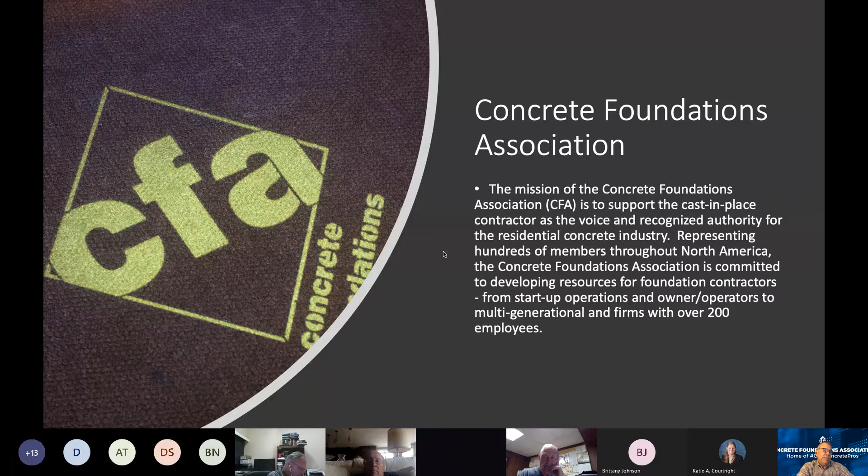Some people have called it the basement dweller industry or basement dweller association, but it really is cast-in-place concrete professionals working in relationship to the International Residential Code.

So what we're going to talk about over the next however many minutes, I'll go until you pull the shepherd hook out and get me off the stage. We're going to talk about cracking in particular.

I use that headline, or the title of this presentation, quite a bit in all of my presentations, whether I'm teaching certification, educating architects on what's available and what opportunities are out there for concrete, or when I talk to real estate agents and help them see how to evaluate concrete systems. We always know the three truths of concrete: it's gray, it gets hard, and because it gets hard, it inevitably cracks.

As structural engineers, you rely on its cracking, because that's what gives you well over half of your design work. Those of you that work with concrete know it's the fact that it cracks. And because it cracks, there's the whole steel reinforcement aspect. Today we're also getting into glass fiber reinforcement products, random reinforcement, or three-dimensional reinforcing.

So there's a whole nature of the industry that relies on the fact that it cracks. But ultimately why we're here is because cracks become problematic, and it runs the gamut from aesthetic to structural problems.

I've broken this presentation up into 4 key areas. We'll talk about some crack patterns and common causes for those cracks. We'll talk a little bit about cracking concerns—when we do see a crack, or when someone sees a crack, what is the concern for it? What might we assign as associated concerns with those cracks? We'll look at some plausible solutions, and then I'm going to go a little bit deeper into the 3 areas that I have primary responsibility for, which would be slabs, below grade walls, and above grade panel construction.

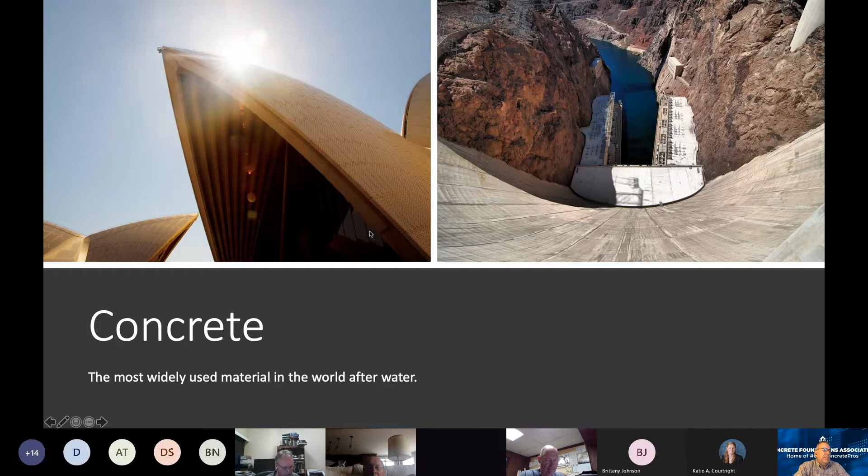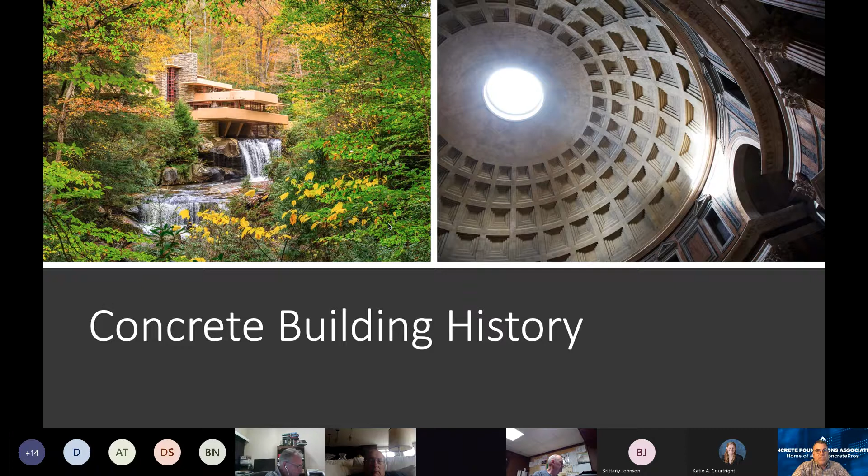The former director of the CFA, who was my business partner for a lot of years, he and I were having dinner last night, and we were still talking about the chance to get to visit this structure. It's still in operation today, and that's staggering to me—to think about concrete and the longevity of its behavior and performance—yet cracking is what we're going to focus on, and the fact that cracking does happen and causes problems in today's concrete.

So let's go into distinguishing some crack problems, some patterns, and some causes.

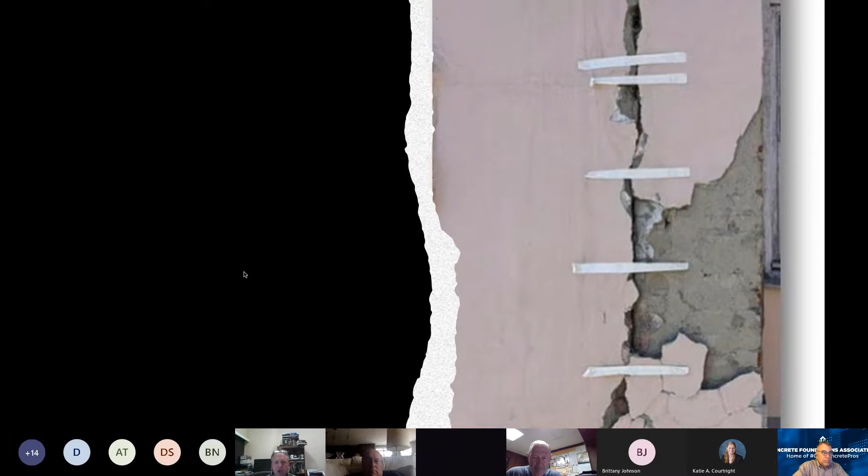A homeowner may say, hey, there's a crack, I'm worried my house is going to fall down. But that's not the same as an engineer looking at it and knowing instantly that's a problem we have to address right here and right now. What we're going to be talking about is more the in-between segments of cracking, and maybe the finer side of cracking. Before I do, I want to talk about concrete materials, because...

It's the nature of the concrete material that causes most of the cracking that we see. We know that concrete is very basic—one of the reasons why it's the most popular, most widely used material is because it is so basic and so local.

It relies on Portland cement, which is the powder, and everybody in the concrete industry hates it when they're at a meeting of a local school board or city council and somebody's talking about the cement driveway or the cement sidewalk.

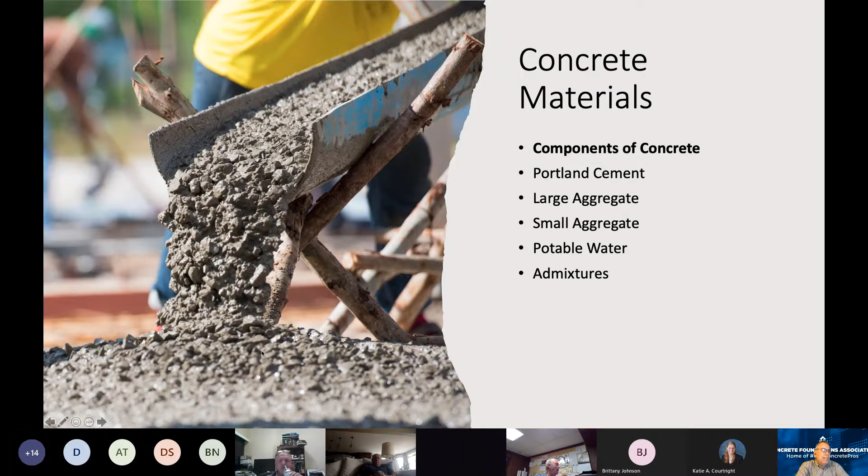Cement's the powder, concrete is the hardened product, and it is because the cement gets mixed with large aggregate, small aggregate, the water itself, some admixtures in today's world because our technology is so great. You see the product sliding down the chute there, and the delivered form is a nearly high viscosity, seemingly fluid mixture combined with some space-making materials. Once the water is introduced to the cement, we realize that there's a chemical process that takes place, and the concrete begins to instantly transform.

The chemical process is hydration. Any chemical process has a byproduct, and the byproduct of hydration is heat. We could spend another 2 or 3 hours just talking about the behavior of concrete and its benefits from a heat generation perspective, but that's also a characteristic that sets the foundation for why we're talking about cracking today. And so we rely on these crystals.

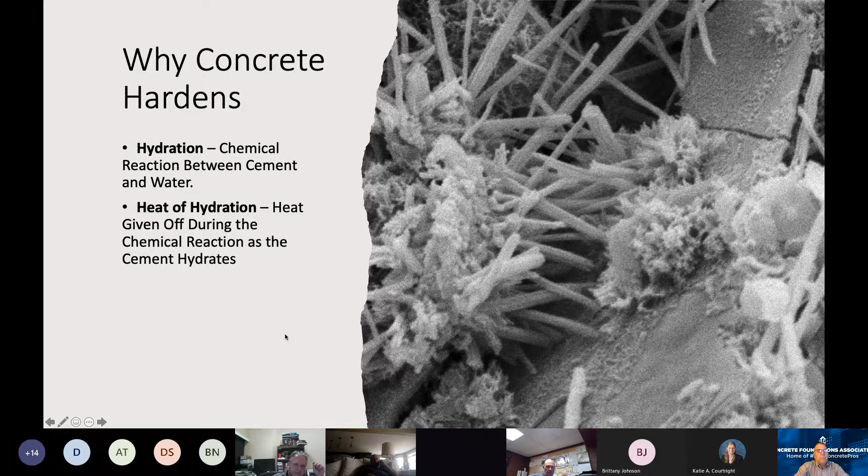This is a microscopic view of hydration, and it's fantastical—the stuff of science fiction. You can see these crystals beginning to envelop everything within the mix. It might be a structural embed that you've designed to connect a panel or a foundation element to another part of the building, it might be the aggregate itself, it might be the reinforcement. But these crystals begin to grow, and they are quite voracious as they consume the water and develop strength. The strength comes from these crystals that connect everything together.

So concrete needs three things. It needs water—we know that, it's a chemical process, a reaction of the cement to the water. It needs temperature; if we cool concrete down, and certainly if we let it freeze, hydration will stop because the water becomes a solid, and if the water is a solid, it can no longer react with the cement.

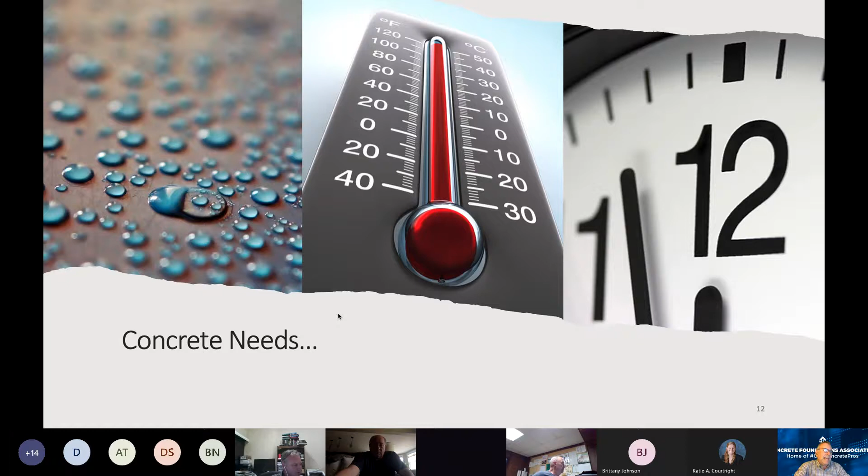So concrete needs temperature in order to mature or gain strength. It also needs time—the longer we give it, the stronger it's going to get. We know that because you as structural engineers will specify a 28-day strength for the type of concrete you want on a given project, and yet a contractor might be looking at the 5-day or 7-day strength. Or maybe it's an elevated slab they've been heating to increase its maturity more quickly, and they need a 3-day strip. So time is an element that's very important to what we're trying to get out of the concrete from a strength perspective.

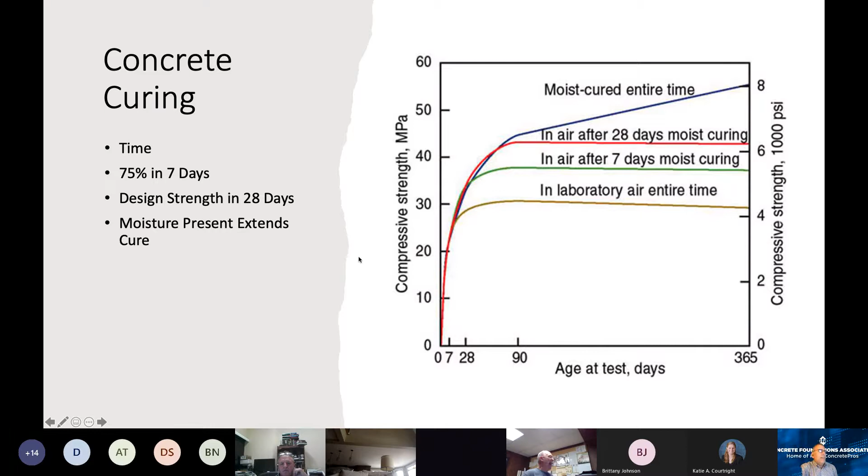This just gives you an idea of how effective moisture is. That means in order for us to really do what we need to do, and we'll look at some slab cracking examples, if we want to control the behavior of the concrete, think of concrete as an animal. If we want to control that animal, the best way to do it is to keep moisture present.

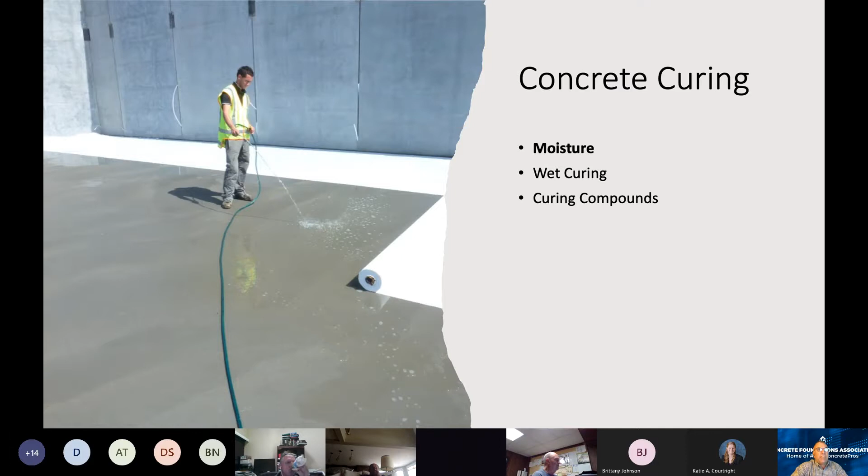The bigger it is, the wider it is, the larger the square footage, the harder it is. So you see a contractor out here putting some water down over the concrete after they've gone ahead and floated it and finished it off, and then they're going to put a fabric over it, and this would be a water barrier fabric that's going to keep that water in on top of that slab surface to help give it that moist curing environment. Try to get another 3 or 4 or 7 days out of its curing before the water is completely consumed or evaporated.

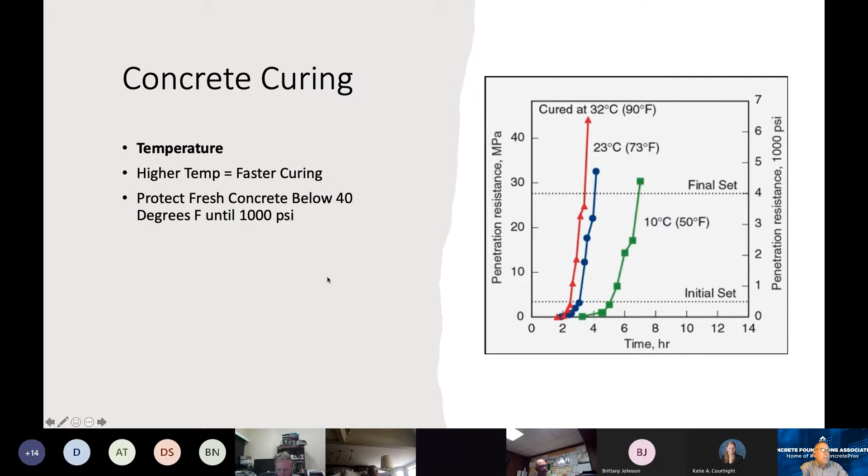And it will negatively impact construction schedule. But we're talking about it from a concrete cracking perspective. And as we look at some of these examples, the importance is that the delay extends the behavior of concrete and lessens the behavior of cracking. So we become less concerned for cracking the slower it gains its strength, because we're consuming water at a slower rate, which is also controlling its dimensional change.

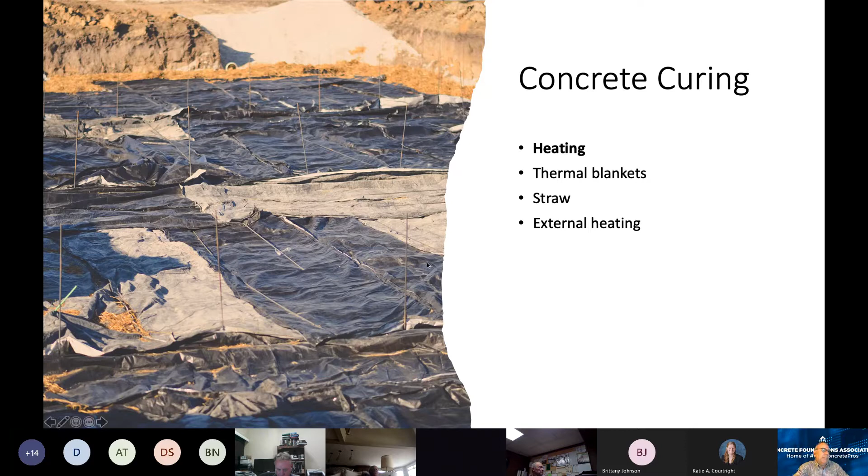We can also, on the other side of it, get into the summer months, and we're trying to slow that heat gain down, because a 100-degree Colorado day with the sun beating down on it, as dry as your environment is, your climate is going to suck that moisture right out of the concrete, which is going to mean the strength is going to get to its finite strength cap, or its ultimate strength cap, more quickly, but it's also going to dimensionally change more quickly. That's what we're kind of setting the stage for as we begin to look in on cracking.

So some of the things that we know, again, the framework for what we're talking about: of course, you specify a concrete in terms of PSI, pounds per square inch. Compressive strength, typically the range that we deal with in most of these construction industries is a 2,500 PSI baseline, maybe up to about a 5,000 PSI. And if you talk to ready-mix producers today, they're really targeting in at a minimum of 4,000, and a lot of them are producing 5,000 PSI, because they know if they deliver a little extra concrete strength, that it handles some of the problems that are closely associated with mix performance, excessive moisture, added water on the job site for viscosity and flowability, maybe even the concern that a concrete's going to crack and they're going to get the finger pointed at them because it didn't get to the strength that was specified, and so they give a little more to it.

And so the modulus of rupture is relatively low. If concrete is weak in tension or flexural crack resistance, that modulus of rupture means if we apply pressure perpendicular to its structure, it's going to fracture at a very low strength.

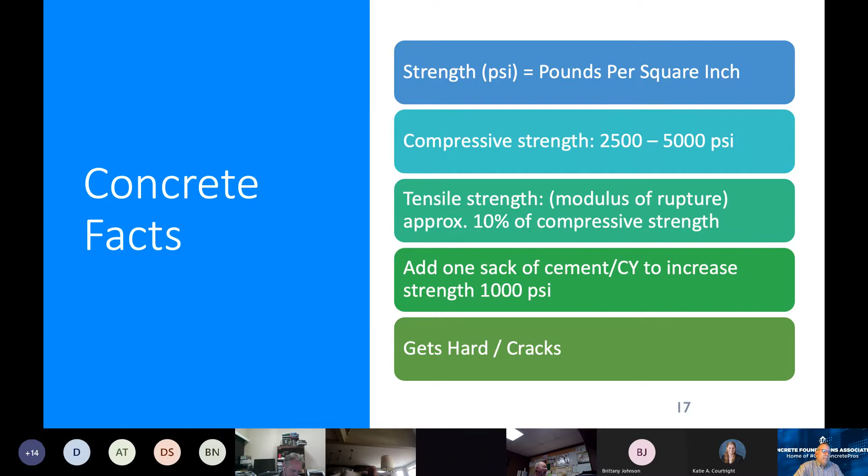That also means we have to look at what sets up the stress in the concrete that ultimately develops the cracks that are brought to your attention, or mine, and everybody's concerned about them because they're unsightly. What are we going to do about it? Let's take a look at why that happens.

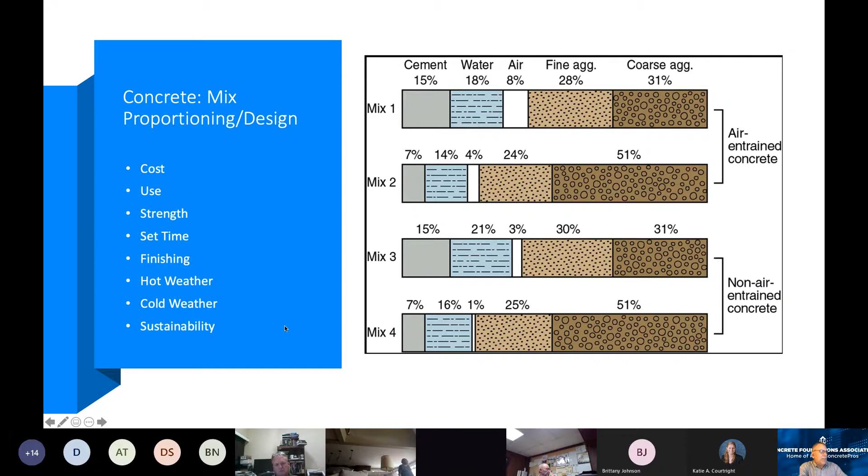And that's where we begin to set concrete up for the type of cracking that most often is the callback or the concerning call that we get. It does change based on a lot of these variables, particularly the evolution between hot weather and cold weather. So we know adding water happens—adding water can be a good thing.

When we're adding water, you can see a lot of the disadvantages. I speak to contractors about this all the time - it's a rigorous part of our certification, controlling water. But the three things that are most important to me are the poorer bond between the concrete and the reinforcement, the increased drying, shrinkage and cracking, and the greater volume change. Those are the three things setting us up for cracking.

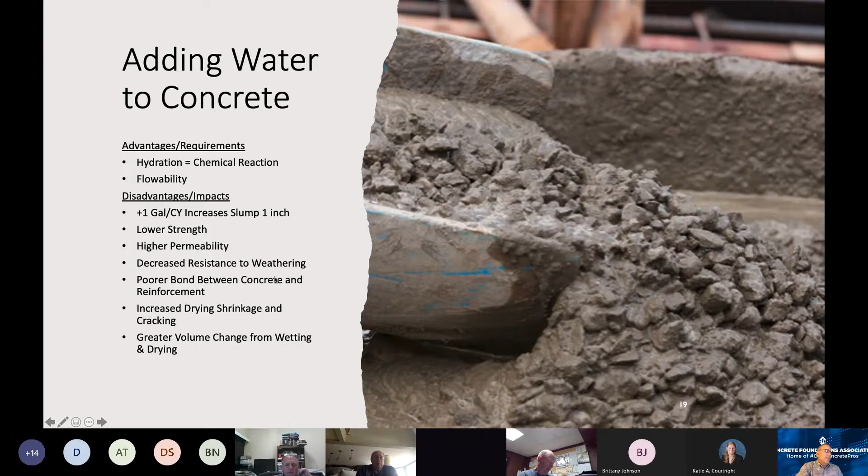And what do we get? We get cracking of all kinds of natures. So here's a porch stoop slab. In this particular design, you might expect a frost wall around the perimeter of this slab, and then they poured a concrete cap after they backfilled it - let's hope they engineered it and put a nice subgrade aggregate underneath there. Then they placed this concrete and really felt like they did a great job.

It was a beautiful looking surface that they left for the homeowner. The next spring, they get a call from the homeowner saying, I've got this huge crack across this porch stoop - what caused it, what are you going to do about it? We know that's a classic example right there in a horizontal plane of horizontal cracking coming from shrinkage, the volume change.

I'll be willing to bet anything on this particular case, the contractor used a high water mixture, a high water cementitious ratio. They were probably either wheelbarrowing it in or direct shooting and wanted to make sure it flowed in there well, and it probably didn't have a high constitution of aggregate. Lo and behold, as that concrete tried to dimensionally change - it's anchored at the left side against the brick wall, and anchored on the opposite side, we're looking in on the short side - it just tore itself apart.

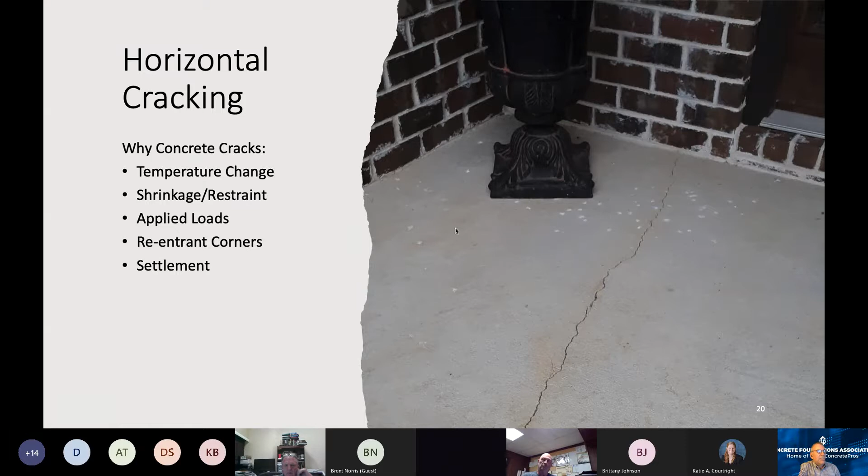Here's another one - this is a vertical wall. This crack that you can see, we're looking right at a form joint between two cast in place form panels, and then a crack that loosely follows that form joint running up or down the wall. Again, the nature of these cracks - the homeowner goes down, maybe trying to finish the basement, and what do they see in addition to the crack? You can kind of see it with these tan lines coming off that - that's soil residue. Moisture's been coming through that crack.

It's an indication of when a crack is problematic, and we'll be talking about that throughout, because we're getting moisture coming through that crack. In general, this is a shrinkage crack. Shrinkage cracks - because the wall ideally should be reinforced, although for the better part of 50 or 60 years, even the International Residential Code did not require any reinforcement, any horizontal reinforcement in residential concrete walls - there was nothing really holding that wall together, that crack together.

So if there's nothing holding the crack from getting wider, or from slight, minuscule to the eye displacements, it's going to start leaking. And it leaks from additional water pressure in the soils outside, any changes to the drainage if drainage is present, changes to the grade as settlement occurs, as well as applied loads.

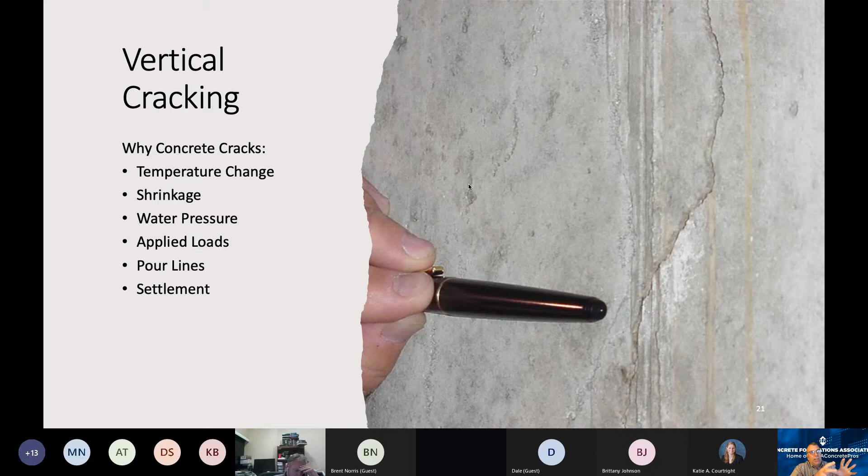Maybe somebody is parking a camper out on the backside of a wall in the backyard, and they don't realize the load of that camper on the ground can start to push in and create some changing conditions to what the design initially had accounted for.

Here's another type of crack. We looked at horizontal and vertical shrinkage cracks. Now we're looking at what we call a reentrant crack. This is probably one of the most common cracks, particularly when dealing with geometry-based cracking or vertical sections. Although we see them a lot in horizontal planes, typically contractors do a good job of making sure they cut a joint in a slab related to that reentrant corner.

But a reentrant corner is basically any time you see an interior corner to a concrete mass, or where the concrete turns at 90-degree angles on itself. And that means there's going to be shrinkage stress.

If you can imagine those two sides, we'll call this side 1 down below the window and side 2 up high on the window. Down below the window, it's part of the wall that goes to the left off that window, and there's shrinkage forces trying to pull that concrete to the left. At the same time, all the way up above the window and to the right, that higher wall section is shrinking at a different rate off to the right.

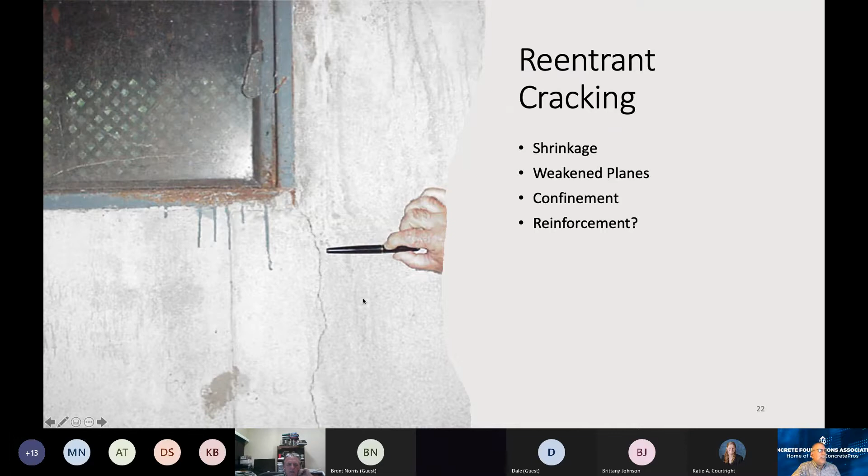And where's the weakened plane? It's right there at that corner. Often we see contractors not putting any reinforcement that will control or prevent that crack. Ultimately there's probably a microscopic crack that ensues, and it won't control it. So then you see the crack begin to propagate downward, and it's going to always continue until it finds relief. It won't find relief until it gets to the end of the mass. So a very common segment of cracking.

Other cracking can be associated. So those are all three shrinkage crack options. Another common form of cracking is applied load cracking.

Now this gets a little bit more into structural design issues, although I'll tell you that particularly these two cracks, and we'll look at some other examples of it later on, are means and method cracks, because the structural engineer does not design this condition. You've got a footing that's got a crack in it, and you've got the panel above that has some evidence of cracking that has come from that as well.

And so you've got a footing that's settled. The reason the footing settled is because of the length of time that this particular concrete panel sat on the footing without 100% bearing. Typically in any kind of vertical application, certainly cast-in-place wall, but in precast and tilt-up panel constructions, the structural engineer of record is designing continuous bearing. There's a period in time where the contractor has to support this on temporary supports - you can see them right in the middle there and off to the left side of the image, shim stacks or temporary supports before they're able to fully grout. And that puts a lot of stress.

In fact, 75 to 80% of the building load for a tilt-up building or a precast building exists on the footing the moment the concrete panels are set. And if the footing is not designed for that point load in terms of longitudinal reinforcement and width affected by the soil capacity, then cracks are going to happen.

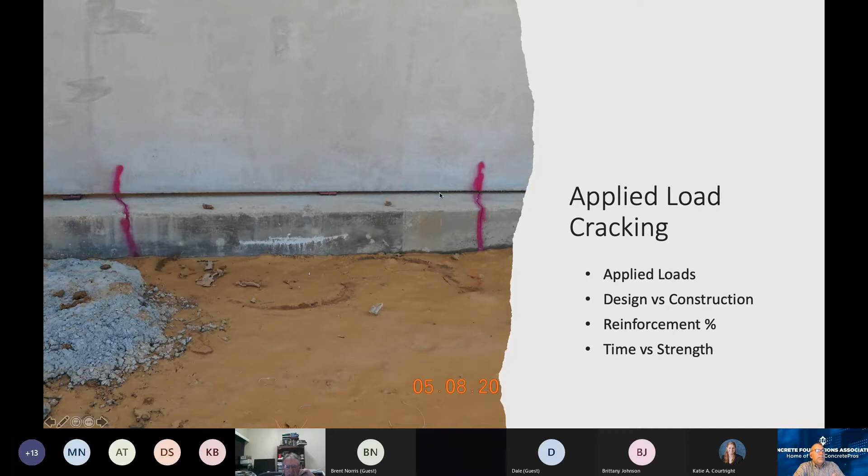And so we teach contractors the urgency of starting to get some additional supports in there and ultimately get into 100% grout placement.

There's another nature of cracking that happens immediately. This is probably one of the more problematic cracks from an aesthetic perspective and from a satisfaction perspective. It's called crazing cracks. It's caused by capillary shrinkage.

And so if you can imagine this floor slab, we've just placed the concrete, we've got it all floated off, it's got its bleed water that's risen to the top, and then we're in Colorado and the winds are blowing and the sun's out there baking that concrete. When the top of the concrete slab, or the top of any concrete element, but particularly in slabs, begins to dry faster than the volume itself and the thickness of the element, you're going to see these crazing cracks develop. This is where the surface tension is created within the concrete slab section, and it begins to pull itself apart.

And it pulls itself apart in that upper half inch of the section, based solely on high evaporation rates. This is where you see it in more arid, warmer climates, like the photo I showed earlier with the construction worker spraying water and rolling a fabric over the top of it, trying to keep that water in that surface.

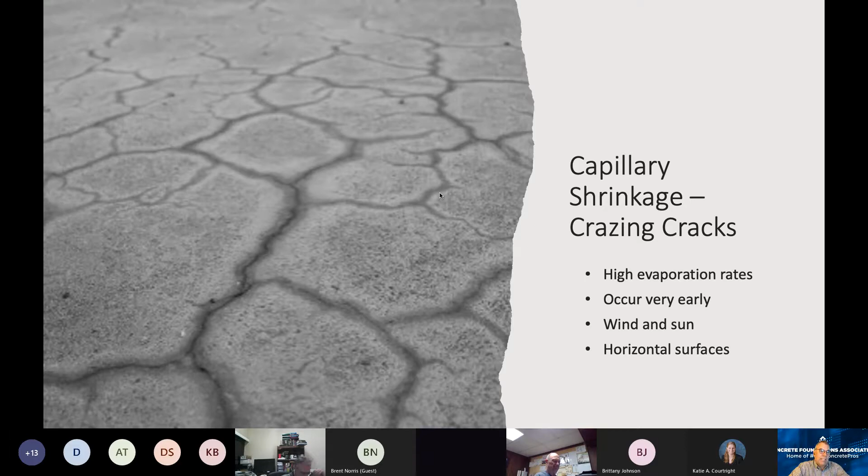Give that concrete a chance to mature, because there's no way the top surface of this slab can achieve its modulus of rupture, the designed 10% of compressive strength, when it doesn't have the aging on it yet to get to that strength. And so that crazing crack is really easy to pull the surfaces apart.

From my seat, one of my common inquiries is the pour line. I get it at least a dozen to 15 times a year. Why do I have this diagonal to horizontal crack in my foundation wall? You can see a pretty good representation here. That's a pour line. It's not a crack.

I always throw it in there, one, for a bit of levity in the conversation, but it's also a reality. We're conditioned to look at the inconsistencies, the abnormalities of our concrete when we see them, particularly if you're the owner and you've invested in this. So this looks like a big old problem waiting to happen. Is it? Probably not, particularly if proper vibration techniques were used to make sure we got some consolidation between the two different timings of the placement.

Ultimately, this is set up because one load was finished off and kind of allowed to run itself down almost to a self level. Then we came back with the second load, and maybe it took an extra 10 or 20 minutes to get to the job site, so you started to get some color change there. That'll never go away, you'll always see that little line, but properly vibrated, it really isn't a problem.

It only becomes a problem if it turns into a construction joint, where that lower section hardens, the upper section never really got fully bonded to it, and we get some leakage through it.

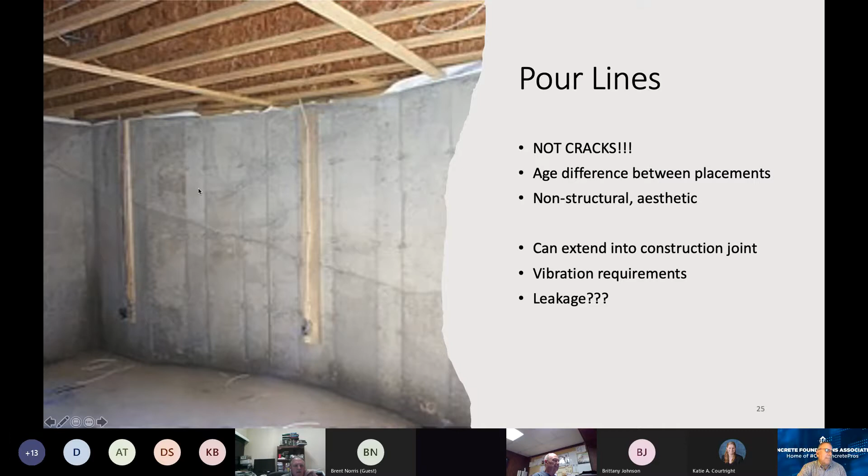Okay, Brittany, let me just check on any comments or questions that we want to get to. I don't have any in the chat right now. Awesome, thank you. I'll let you know if someone ends up typing one soon.

Perfect, all right, so cracking concerns and solutions. So when is a crack a concern? As I've said over and over again, I think the number one reason why a crack is a concern is because it's an aesthetic influence on the expectation.

So we teach a lot in tilt-up certification about the idea of mock-up panels and how important it is to deliver a mock-up panel that is as close to what you think you're actually going to be able to deliver as possible, which is not a bad thing to try to figure out if you can get a crack in that mock-up panel intentionally, because they're going to be there.

But the aesthetic influence of a crack is certainly one of the number one reasons why cracking is a concern. It's why you get called in, it's why I'm presenting to you today, because somebody over repetitive times in each of your careers has said, hey, I see that crack, tell me more about that. Why did it happen? I thought you reinforced it or designed the reinforcement so that wouldn't happen.

Sometimes they're unavoidable. The second is leaking. If a crack leaks, if you're trying to prevent climate control or provide climate control from the exterior to the interior, and you get leakage, that's definitely a problem, and cracking could be a huge concern there.

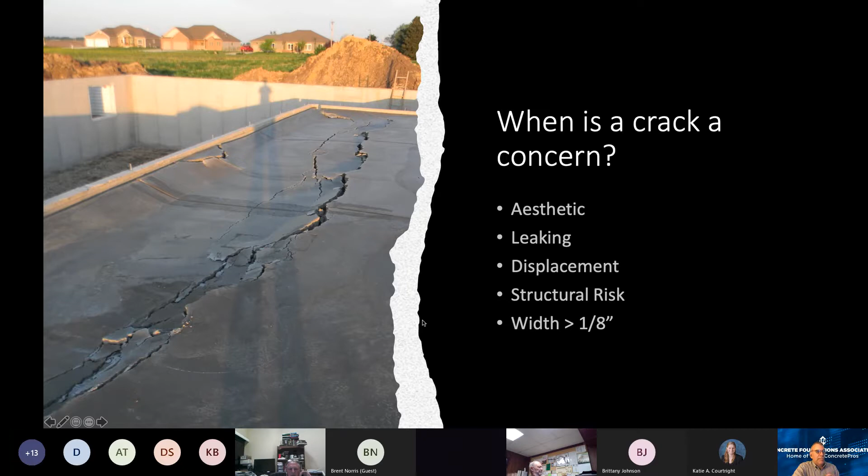But the other thing we really key in on is that when you see a crack develop, most of them, almost all of them, are less than a credit card thickness. And if a crack width opens up to about 1/8 of an inch, that's when we really start to get concerned that the cross-sectional performance of the wall may be sacrificed, at the very least for water leakage, if not for something more than that.

So let's look at some other different cracks. This is a horizontal crack in a wall. This is a big flag for me. Now, it's not a pour line, but as I'm looking at conditions that get sent in to me, doesn't matter who it comes from, most often it comes from homeowners, and I'll see this horizontal crack, and I'm really attentive to the horizontal cracks. I want to know more about the stability, the vertical stability of that wall.

In this case, this is a foundation wall. I want to know if there's any evidence of bowing. Now, there's a difference between bowing and out of plane. Out of plane could have been created just by the wall being out of plumb when the contractor placed it. But we want to particularly look for bowing. We want to look for evidence of dimensional change, deformation, or displacement on each side of these cracks.

Because once we get this crack in place, as you may know, we're relying fully on the reinforcement for structural performance. And steel's quite ductile. Once I start to get a horizontal crack with a load from the outside, and that pressure is a combination of soil and moisture, as well as maybe some applied loads at the grade level, the steel itself may not be sufficient to control the bending moment that's applied into that wall. So we want to be very careful about the types of horizontal cracks that we're looking at.

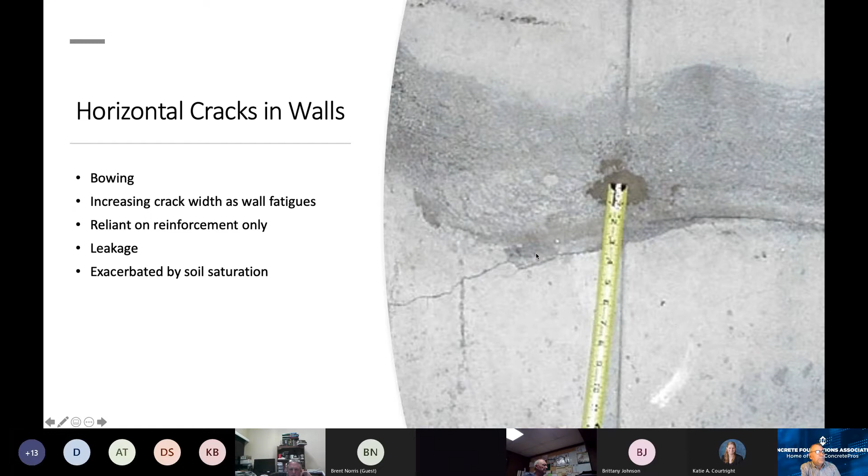Here's a crack in a slab. I've enlarged this to really look at the crack itself. You can see the joint cuts by the contractor. As nice a job as that is, although it's a pretty messy, the slab joint that's going vertical there is kind of unraveled. The timing was a little late on that crack, but the horizontal one's really nice. And yet, as nice as that horizontal crack is, look at what the concrete decided to do.

So what does that tell you? It tells me, first of all, that they didn't go deep enough with their slab joint. You can kind of tell based on the dimension of that horizontal joint. So when I get a chance to look at slab cracking, in particular shrinkage cracking like this one evidences, I'm going to look first at the slab joints. Where were they? Were they close enough together, or did they stretch them out? Very rarely am I concerned about the reinforcement in the slab, because contractors almost never get the reinforcement in slabs right. But I want to look at how deep is that cut.

If that cut was deep enough, that crack should have never happened. But what happened in this particular case is that slab joint was just far enough apart, and it wasn't quite deep enough. So the modulus of rupture of the concrete was sufficient that the crack ended up right here. It probably initiated right here where it had friction hang-up with the adjacent slab section, and then it began to work off to the left until it raveled up and found the horizontal joint we're looking at, and then it probably cracked and continued on across that.

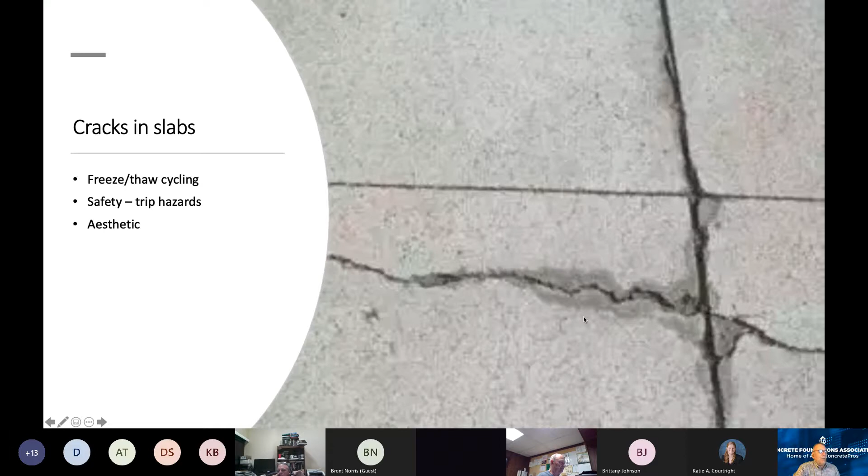So we got to looking at the drawings, and back in the early 70s, this is down in Florida, one of the things they liked to do, because they were worried about construction tolerances, is set up the panels about 10 to 12 inches apart. Then they would come back, form the gap between the panels, pour it full of concrete, and have steel bars dowelled into the two tilt-up panels to provide continuity.

So the first thing that tells me is you've got a building here that's a couple hundred feet long with no expansion joints in it. So you've got a 200-foot long concrete wall that's just growing and shrinking in the hot Florida sun with no movement relief. And so the concrete's going to find a way.

This concrete column, because the dowels into the adjacent panels, little by little began to get pulled apart. Structural concern? No, not in any way, because they're not relying on this column for the stability of the roof diaphragm working with the walls. But it is certainly unsightly and an aesthetic issue.

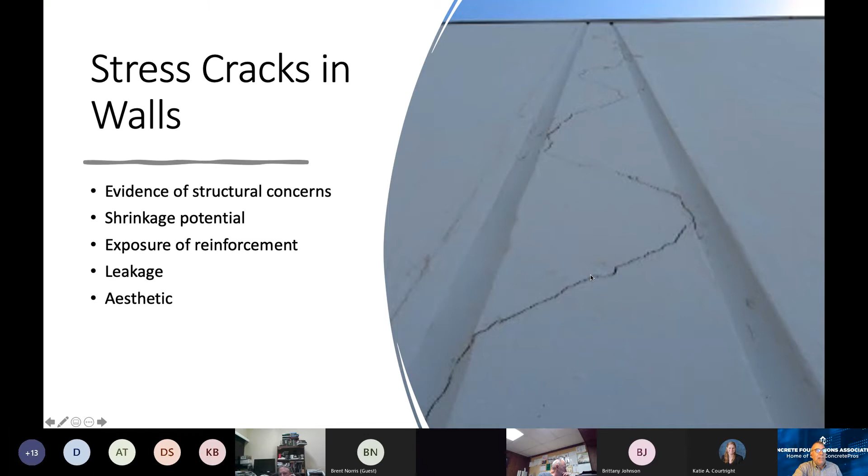Could be a potential for leakage. In this particular case, the crack on the inside wasn't as significant, so they weren't getting water penetration. And it's also a crack width that I could put a coating over it that would span the crack and not allow water to get through. But it was an interesting study. I had never seen panels connected like that before, and a great study in cracking.

So when we see cracking, some of the things I'm looking for as I begin to look at pictorial examples, if I get a chance to go to the job site, or if they have me come out to do a look, or if I send a colleague, a structural engineer member, or someone else from our association to see it, we're looking at the impact of the mitigation effort. What really needs to be done? What is the number one concern in this particular crack case that we have to deal with?

If I've got a vertical crack on a foundation wall that's leaking, do I have proper surface drainage? Do I know the drainage system is working? Do I need to run a camera down there and determine that the drainage tile was either cracked or damaged during backfill, or maybe it became clogged? It was a crappy system in the first place, or tree roots and other vegetation has clogged it up. Did it silt in? Those are things that can cause water to build up against these concrete elements.

Is it waterproofed? First of all, if it was waterproofed, is the waterproofing breached? I've got an example coming up of a waterproofing issue. I'll tell you about waterproofing and how you can breach waterproofing when I get to it.

And then what's the mitigation steps, or what are we going to do? Can we epoxy inject it so that we secure it? Can we keep the moisture out of it, either from the internal to the external, or vice versa? What are the methods for minimizing that crack development? Or can we mitigate or modify the concrete either in behavior or by a system, belt and suspender maybe, particularly in the case of a horizontal crack where there's bowing, that will minimize the crack and prevent further crack development?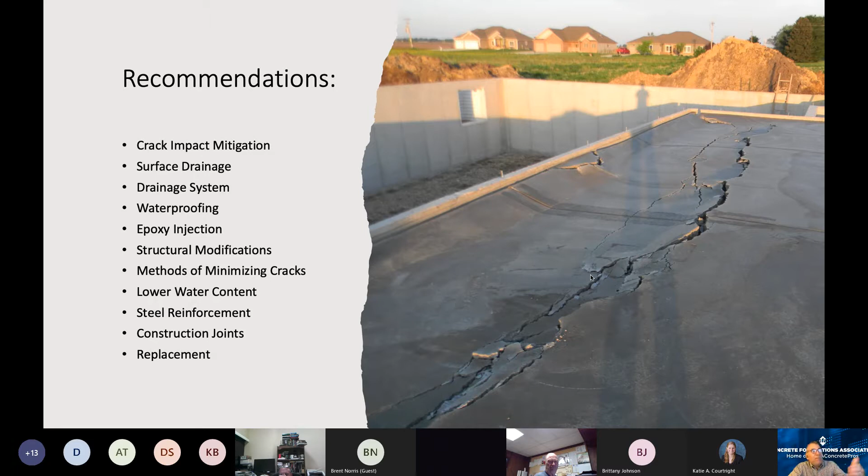We talked about that early on, providing steel reinforcement. A lot of the idea of plain structural concrete is that I don't need structural steel, and yet I need steel reinforcement to control the volume change, the dimensional change, the shrinkage of the concrete itself, and providing construction joints in the right location. Those are just some of the recommendations we have on a regular basis.

Okay, so I've used up about 50 minutes. Now what I'm going to do is give you some rapid fire examples. I'm a storyteller, so I'll probably get into some stories here, but I'm going to give you some other areas that you'll commonly see, and we'll talk about some of the crack development.

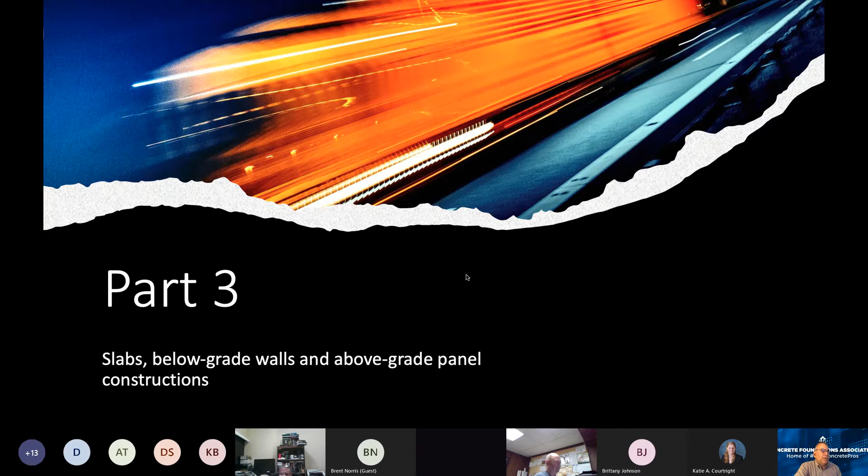Slabs, I said it before, say it again, slabs are probably the most common for cracks. It's where we spend most of our time. We're constantly walking on them. The only thing that has lessened the influence of slabs being the most common area we notice cracks is the fact that everybody's holding a smartphone now. Half the time they're walking with their head down, their eyes on their phone and not on the concrete. Before, it was always eyes on the concrete because you didn't want to look at the person coming to you. But cracking in slabs is significant.

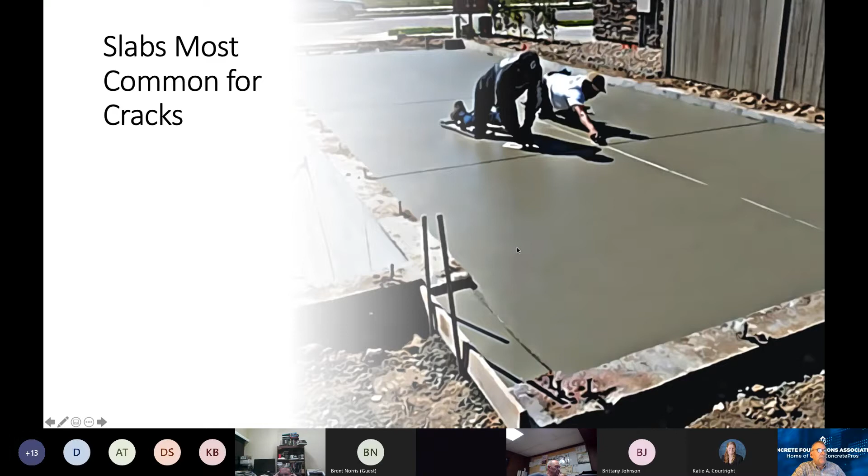And that sectional weakness, as I said before, we can calculate it. We can determine based on the thickness of that slab, assuming that our tolerance is right, where that crack's going to occur.

Now, I can also use cracking to tell a contractor that they didn't meet tolerance on a slab. If I've got a shrinkage crack that misses the intended joint by a foot or more, I can begin to calculate the slab thickness and tell them that in this particular area of the slab, they probably had a bulge in their subbase, and instead of being a 4-inch slab, it's only 3.5, or maybe 3 1/4. Sometimes I've seen slabs get down to 2 3/4 inches, and there's where the crack occurs.

So it's almost always going to follow sectional weakness. In fact, I think it is always going to follow sectional weakness.

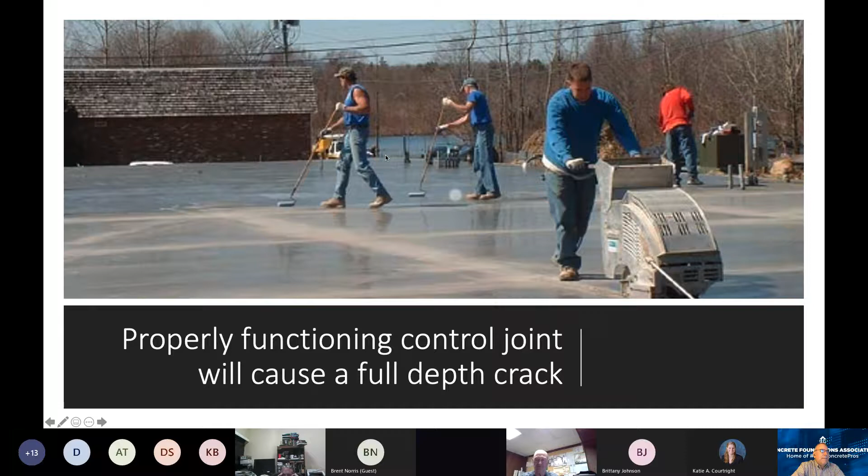But still today, most of the cracking we control in slabs is by proper control joints. The timing of those joints is critical. The depth of those joints, as I said, is critical. And here's an example of a proper slab joint. You can see when the slab is cut properly, the crack will occur really nicely right in that cut, and it'll go the full thickness of the slab.

And as long as we've got a good base underneath this slab, we won't get any differential or displacement between the two slab sections, and that will be a lifelong slab that won't evidence any problem. If we don't cut that slab joint thick enough, then the crack may start, but inevitably it's going to find a weaker section. It could be a piece of aggregate that causes it to head off in another direction until it finds a weakness.

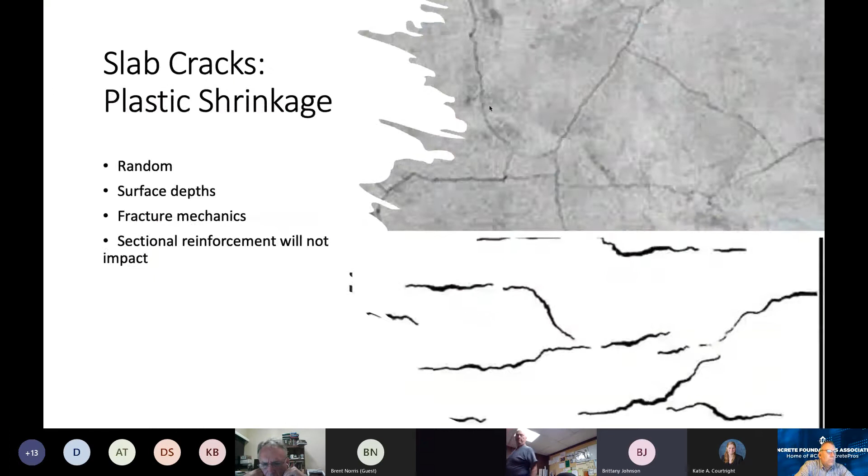So in slide 34, the image of the cracks do not extend to the edge of the concrete. We have seen cracks such as this in practice. Why would the crack not extend to the edge of the member? I would say that it will.

It will eventually. Now, if it doesn't, I'll tell you an example where it might not. If I get a crack coming and I have an excessive amount of reinforcement - you can get a concentration of reinforcement sufficient to stop the crack development, or at least to the human eye, hold the crack together to where you don't see it. If I look at this particular crack that's starting to warble along here, my opinion is that it started on the right and worked to the left. If it had come from the left working over to this vertical slab joint, and let's say I had a couple number 4s running the length of that slab joint on the inside, on the left side and on the right side, that may have been enough reinforcement to seemingly stop that crack.

So if you're seeing a crack that kind of meanders like that and then stops, two things are going to happen: one, it's going to hit reinforcement to control it, or it hasn't been long enough. Generally speaking, the answer is it hasn't been long enough, and it'll crack through.

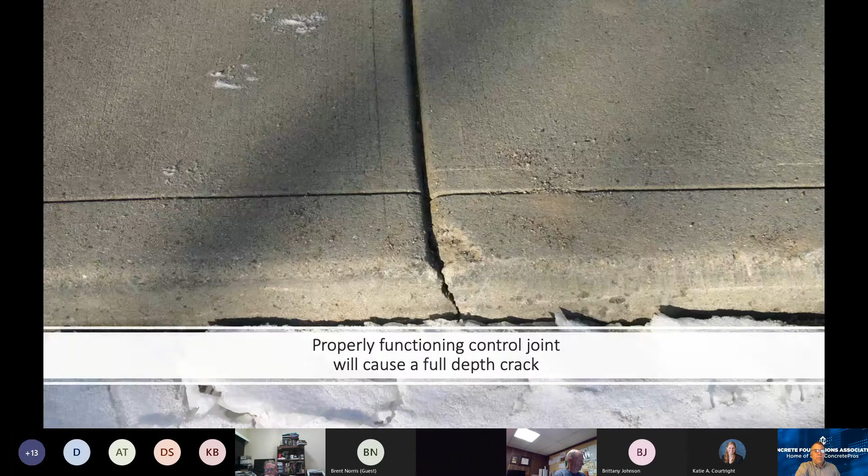What makes you think the crack started on a particular side of a joint? Oh, good, excellent question again.

Okay, so again, if I assess a shrinkage crack scenario, if you look at these two cracks, what this tells me based on the dimension of the joints is that the vertical joint adequately separated the two concrete sections so that we're getting movement. If we're getting shrinkage movement in the vertical direction, as that shrinkage is trying to compress the two slab sections on either side of that vertical joint, I should get relief from that horizontal slab joint. But that slab joint's not thick enough - it's a really tight line and it probably only went down maybe 3/4 of an inch, maybe an inch, and it should have gone down probably 1 3/4 inches. So because that horizontal crack did not allow a cross-sectional thickness to relieve that stress, as it begins to pull on itself vertically, it creates friction on each side of that vertical joint, and that's where that crack ensues.

So it's the roughness of the crack that's been cut and separates - now that's the friction component that starts the crack as it tries to stretch itself. Make sense?

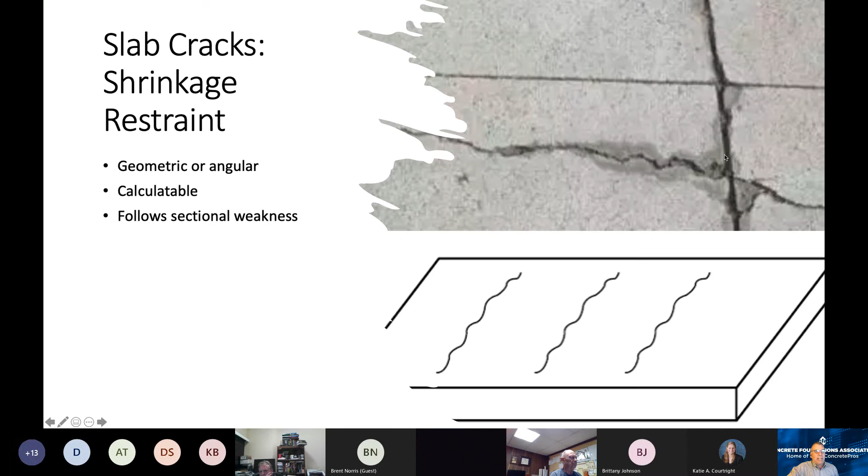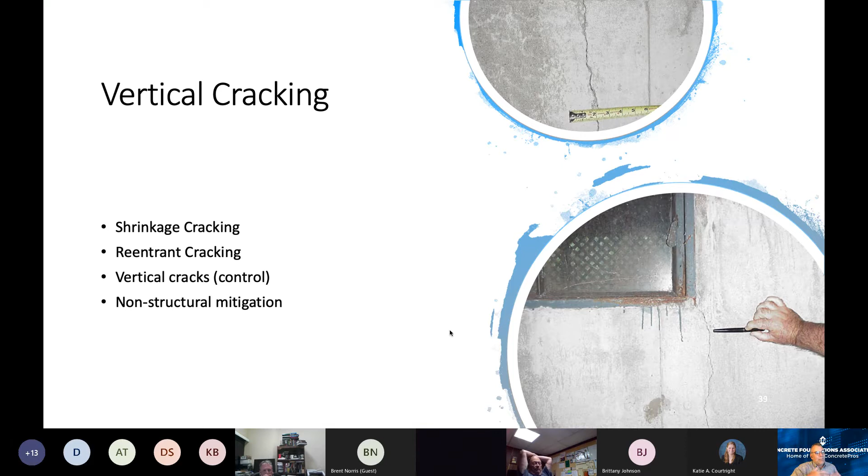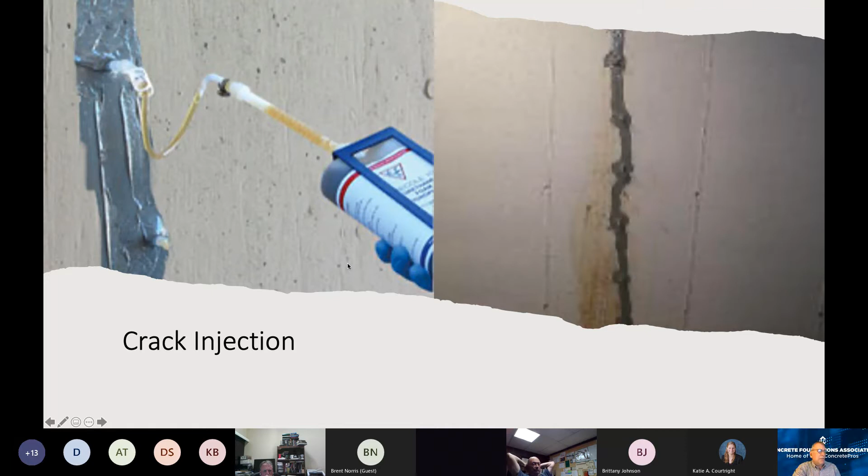So again, these are non-structural. The mitigation for these is a crack injection most often. It's a pretty easy fix. It's an ugly fix. And so then you got to figure out what I'm going to do with the wall to make it look pretty again, particularly if I'm finishing the basement. But if I'm finishing the basement, I'm probably going to put a furring system and drywall in there. But this will lock out moisture. It'll also seal that wall back up so that there's no further crack development.

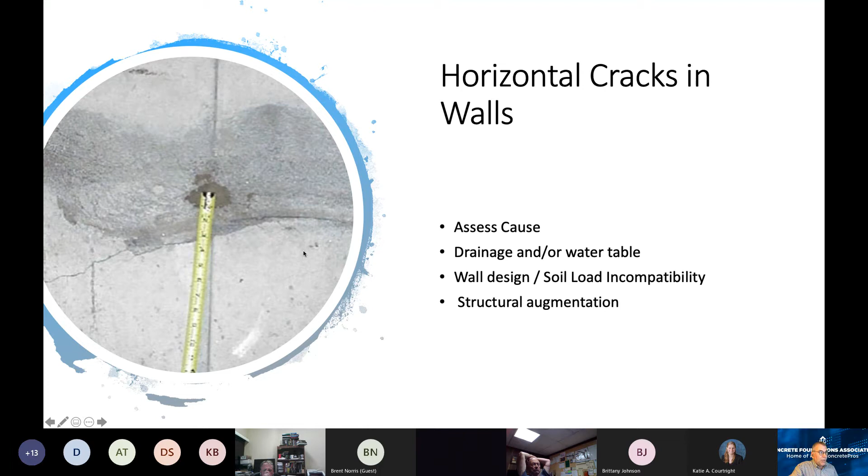The horizontal cracks, go back to that drawing about the soil loads. This is where the horizontal cracks develop, is from a breakdown in the design of the wall versus the construction of the wall. And most of these, in my opinion, occur from means and methods problems, where the builder didn't allow the wall to be braced before backfilling. The backfilling wasn't done in lifts. They used a bulldozer and drove the bulldozer along the side of the wall and put excessive pressure on the wall that began to fold it, or put pressure more than what the vertical reinforcement and the modulus of rupture could substantiate. And so a lot of times structural augmentation is going to happen or going to be needed.

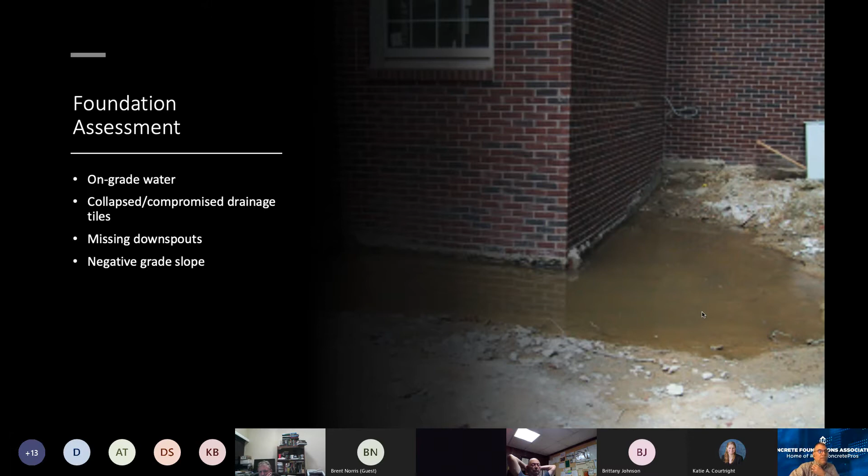Here's an example, though, of assessing the foundation wall cracking. If I see leaking going on the inside, if I start to see cracks that open up where they weren't before, and I come around the outside and I see something like this, obviously I don't have grade, negative grade or positive grade away from the foundation, and I've got water that is congregating and accentuating the soil pressure. And I might go from a design of 45 pounds per square foot soil load up to 60 or 70, or maybe even 75 pounds per square foot, and that wall wasn't designed for it. I get a moat that begins to build up around.

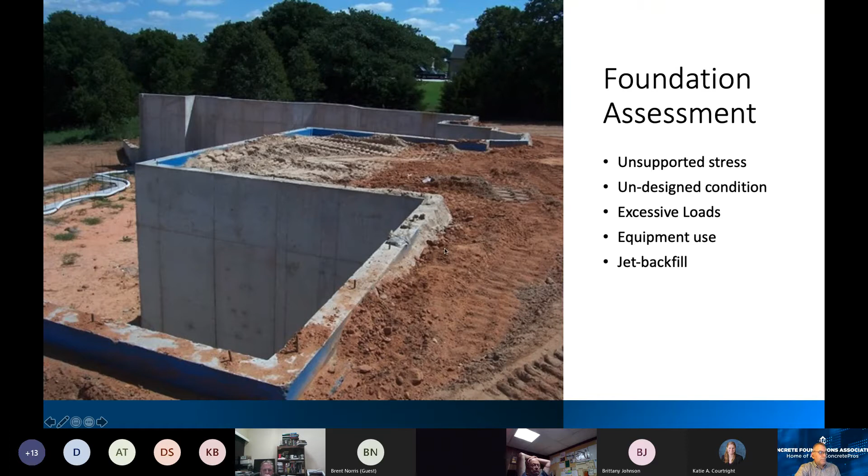There's one of those horizontal form lines that I talked about earlier. If I didn't have fillers that lined up, that's how I could get a crack that starts at a filler form joint at the top and then works away from the vertical joint at the bottom. This is an expensive correction.

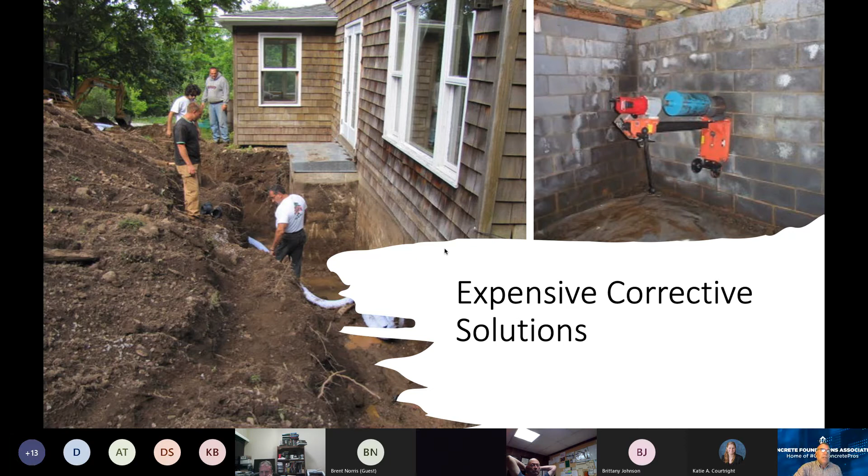So you've got two different options here. They're digging out the foundation so they can repair the drainage, waterproof it, put a dimpled sheet waterproofing, as well as maybe a spray-applied membrane on that to keep water from penetrating the wall. Now I've got a block wall on the right-hand side, but you can imagine if I had a concrete wall that was beginning to fold because of that excessive pressure, we might also have to use the piling soil stabilization system to hold that wall and keep it from bowing in further. So those are some of the expensive solutions that are out there.

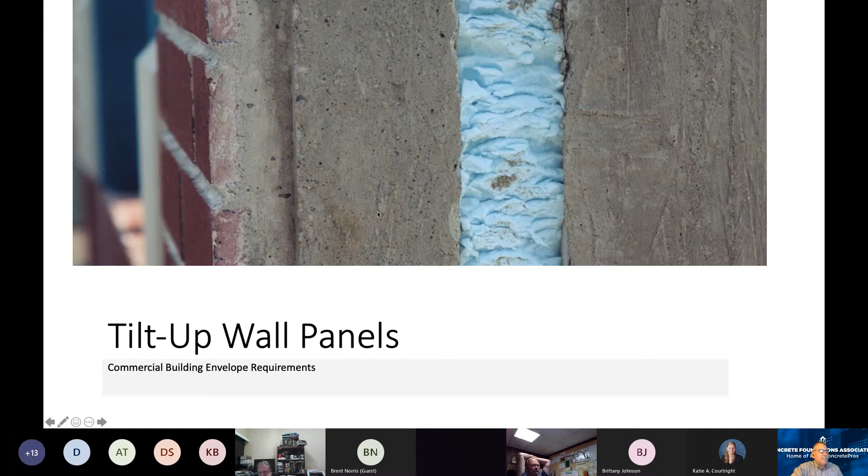Let's move into tilt wall for just a little bit. This is such a common construction method throughout Colorado, and so maybe you guys have seen some of these examples. I don't have any Colorado projects here—I don't think. I won't guarantee that, but I don't think.

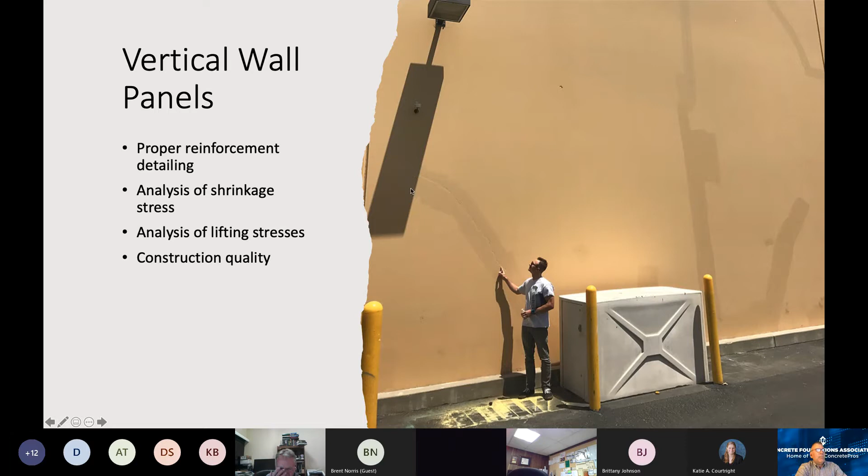To the question earlier about why the crack didn't continue all the way over to the panel joint—it kind of stops at the shadow line of the light, but it will continue across. It is possible in some tilt-up panels, though this one not so much, because there's no opening. So you don't have concentrated reinforcement at the sides of the panel here like you would with column and beam reinforcement for an office panel with multiple openings. There's not likely a concentration of vertical steel right here against the side of the panel, so my expectation is for this crack to continue to propagate until it reaches the panel joint.

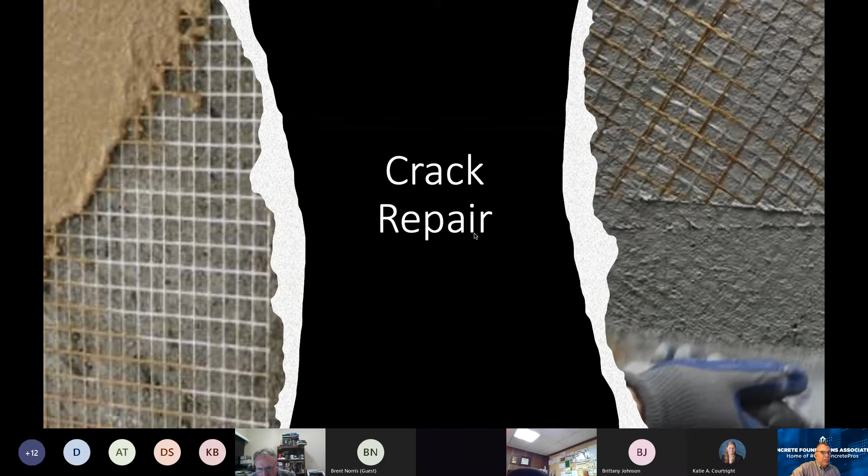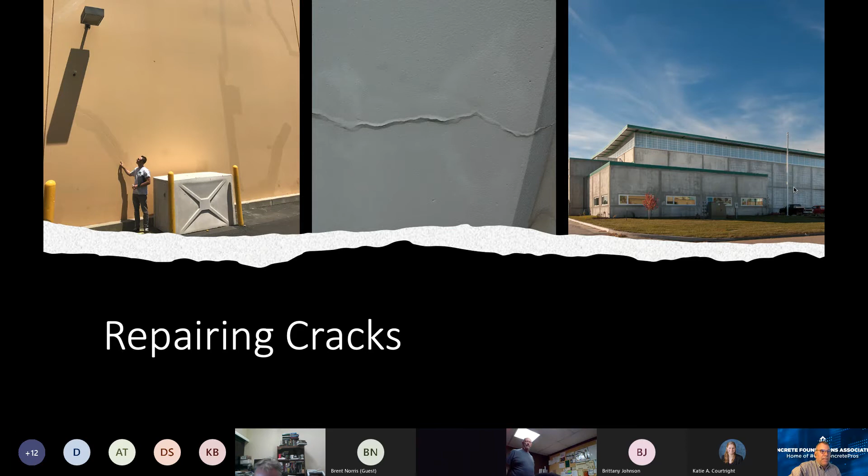Crack repair can be extensive. This is a reinforced Dryvit coating that could be put on if the cracking is bad enough. In the case of this one, the right-hand side where the cracking does look bad enough, you'd think the owner would want to hide those cracks. Actually, what they ended up doing was putting a topical sealer on it—a penetrant that crystallizes in all of those cracks. The only time they were seeing the crack was when the faces of the panels got wet, and by preventing water from entering those cracks, they never saw them again. So that would be another way.

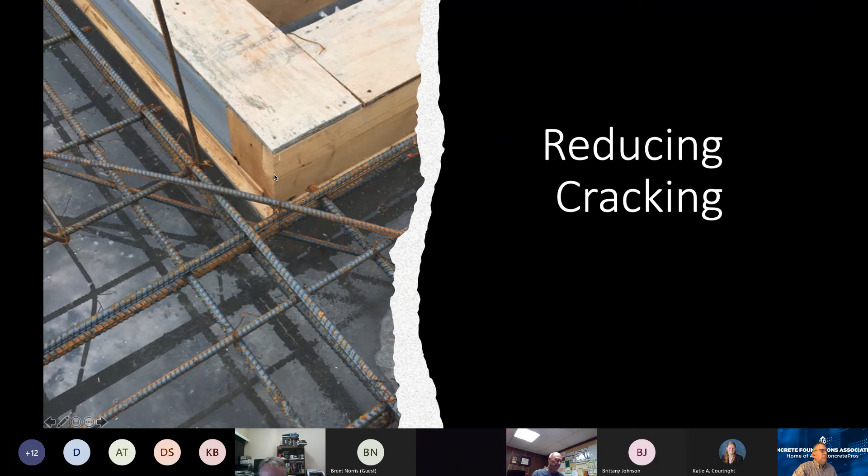Here's some of the reducing cracking we're talking about—reentrant bar reinforcement that should be in place. It doesn't matter what the construction is, there should always be diagonal bars a minimum of 3/4 of an inch off of that corner, tied in place at a 45-degree angle, that keep that crack closed. It will start in the corner right here where that forming is, and once it reaches that steel, if the steel is sufficient, it will hold the crack closed and it won't continue to propagate.

We showed this condition earlier—the load cracking on the footing. The problem oftentimes is that once the footing cracks like that, the footing can begin to rotate. If there's any kind of differential stress on the soils or differential soil bearing capacities, those footings can begin to rotate or shift, and you can open up panel joints. I saw that on a freezer facility several years ago where the contractor had cracked the footing because of the shim stacks and didn't grout soon enough. It went unnoticed until the freezer was operational, and they started getting huge ice dams opening up in the upper sections of the panel joints, because they got rotation in the footing from the amount of cracking caused by the loads of those panels.

One might say, well, there's no load at that crack because the shim stack is off to the left. But that crack development right where it's at is more of a moment crack in that footing as it responds to the load being put into it by that shim stack.

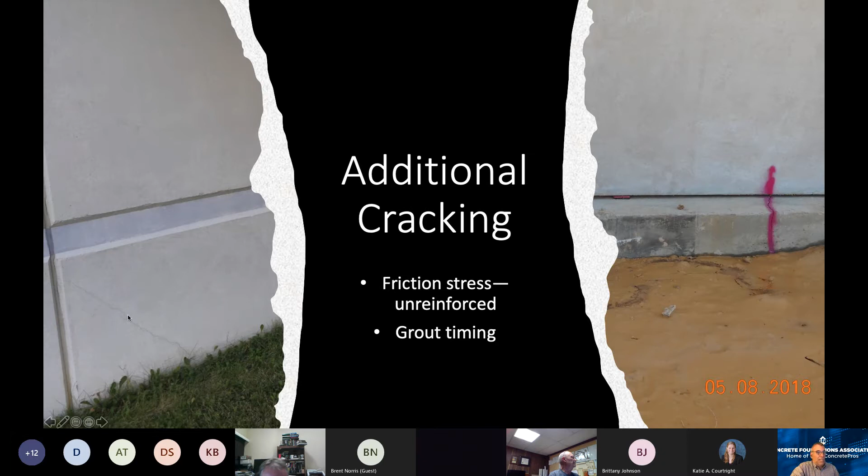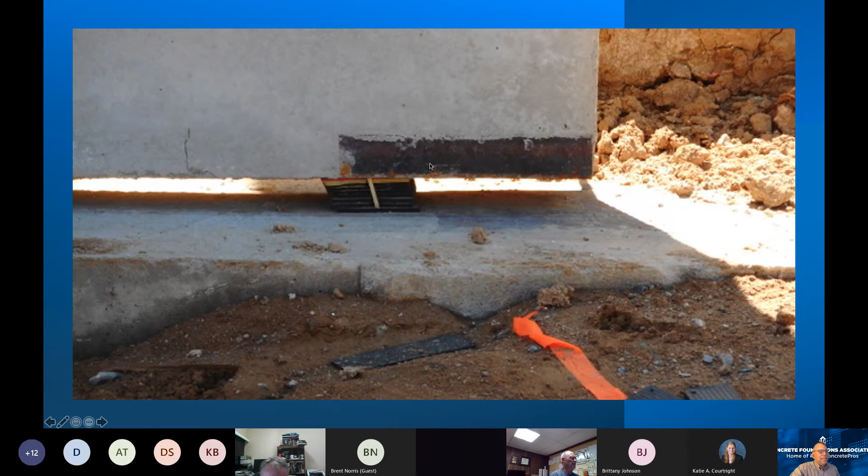Over on the left-hand side, another one of the trim bar cracks coming off at a 45-degree angle—this one, as you can see, has almost, maybe even reached the panel joint before it finished. Once it gets to the panel joint, it'll stop. There's a close-up of the shim stack—this one's really tight against the side of the panel, which is a bit unusual. Most of the time, as I said, it's at the quarter points or third points, sometimes the fifth points, depending on the contractor's preference. The nice thing in this particular case is they've got an embedded angle right here too, so they're getting some bearing on that embedded angle. But it's close enough to the edge of the panel that friction won't cause a trim bar crack to occur there.

This is the grouting that's supposed to happen underneath those panels to prevent sagging or to prevent it from affecting and cracking the footing. This should be done as soon as possible after the panels are braced, to get the load off the footing at those single points.

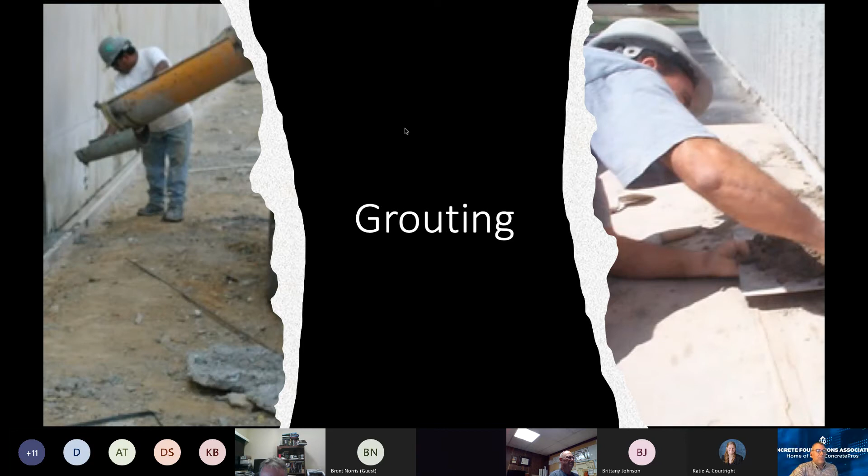At the very least, if the timing of this is a concern, we try to teach getting multiple shim stacks pounded in underneath those panels to decrease the load applied to it.

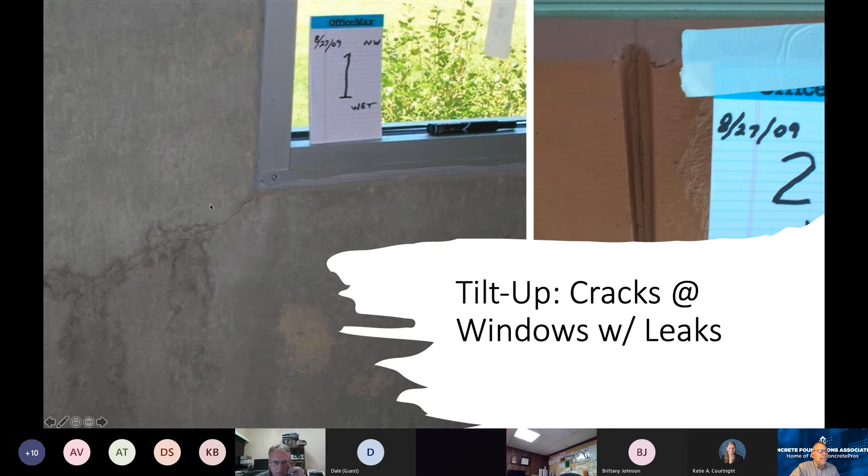Similarly, on this reentrant corner, when we did rebar analysis, we found that the reentrant bar crack control was about 3 inches off the corner where it should have been 3/4 of an inch off the corner. So they had no chance to control this crack from the beginning. Here's a larger image of that reinforcement mat pattern cracking on that project, which they ended up sealing. This was not long after a rain, so the cracks are showing nicely, but they sealed it and are very happy with it. They still haven't painted the building.

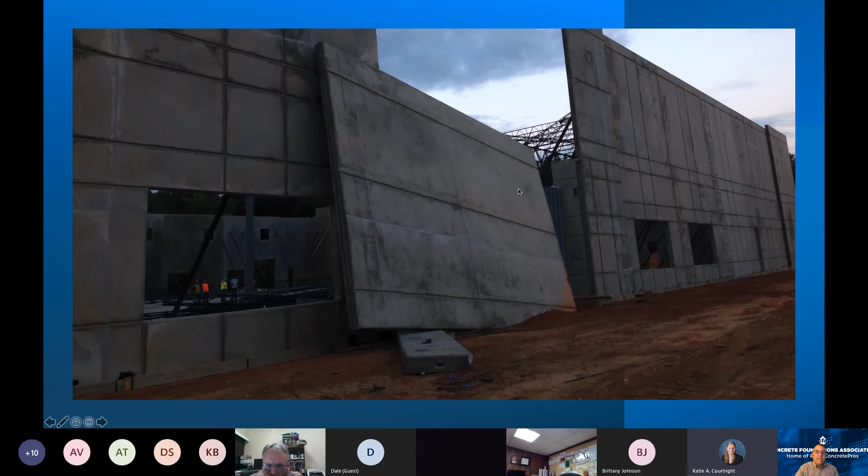Now this isn't cracking. Yeah, go ahead. Real quick, we had a question back on slide 53 about the cracks that resulted from the lifting stresses on the tilt-up wall. Will those cracks typically show up on both sides of the wall or just on one side? In this particular case, just one side.

Again, this is a sandwich panel, and so the modulus of rupture is in the face panel. I also think, if I remember correctly on this one, they designed for a stiffer section. They assumed the full panel thickness would prevent bowing during the lifting, and so they put additional stress in that face. So no, in this particular case, these cracks were only in the face, the architectural face.

You've got insulation, you've got structural panel behind it, and so these did not propagate through to the structural side. Because of that insulation layer that completely separates them, there's no force that would translate that crack into the interior panel.

Now, what you're questioning - I have seen structural panels with horizontal cracks on the inside, and those largely come from that same condition. But when you're dealing with a solid thickness panel, not an insulated panel, it's generally when the modulus of rupture is assumed higher or counted on but not delivered to the design specification, and you end up getting greater vertical flex.

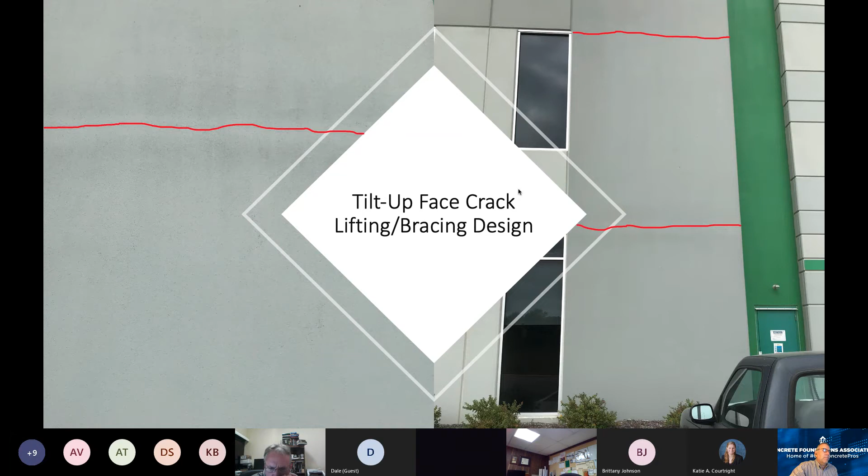I threw this one in there because I just think it's funny. This is an example of obviously a failure on a job site. They had a spandrel panel that was up in the air, and it was being supported by these smaller leg panels. The leg panels weren't tied off, and the whole thing fell down.

Now, what happened once they replaced these - what they didn't recognize, and the reason I threw it in here - is that up here on the left, where this spandrel panel is sitting against this panel with the large opening through it, it put enough pressure and warped that panel.

So they actually had some cracking. You can't see it here, and they didn't even notice it until they cleaned up the panels. But it ended up putting a diagonal crack in the side of this panel where this panel was resting on it. So some cracks just happen. You can't design for that, you can't prevent that one, but it did happen.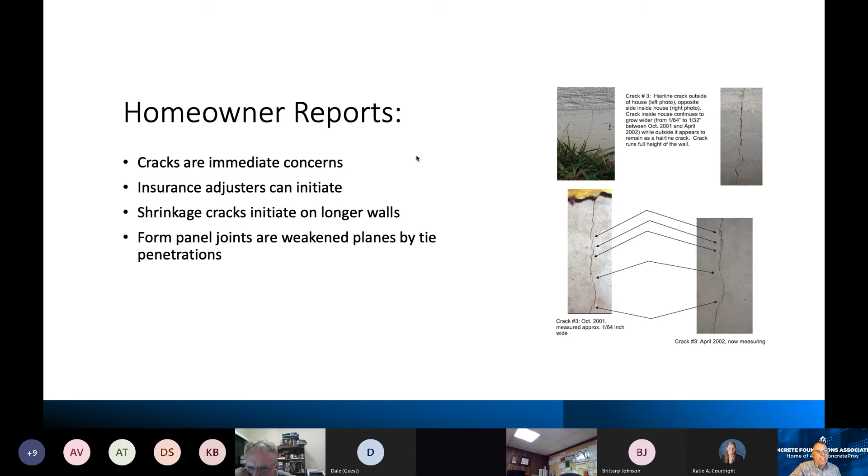And so then they send it to me, their hair's on fire. I want to sue somebody. I want this basement torn out and replaced. And so we go through a process with them of helping them understand their crack, what's problematic, how they can fix it, what they can leave behind.

I've taken a little longer than I wanted to get to this series of photos, but this is a project I was on recently. I had a builder or contractor call me saying, hey, we normally do single-family residential units for this builder, and now we're doing fourplexes, and we're getting a lot of cracking.

Can you come help us understand where we're getting cracking?

In ACI 332, which is the residential concrete code, there's a lesser amount of steel reinforcement required than what you see in ACI 318. One reason is because the sizes are smaller, the maximum plan dimensions are held tighter, and so concrete doesn't have as far to shrink. We're not developing as great stresses.

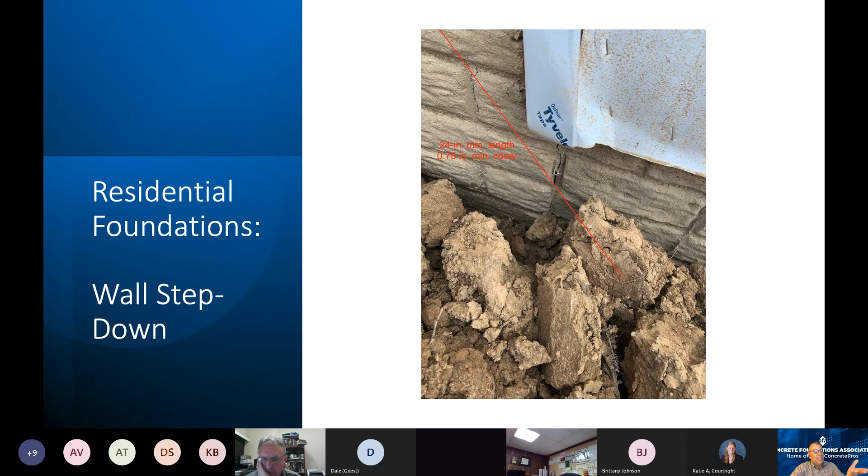It doesn't take a rocket scientist to figure out somebody's missing what grade line means on the drawing, and they're over it by about 6 inches, because this is just rough grade, and they've still got more to go as they bring in the sod. So they're getting water pressure down inside their waterproofing, which is back to what I said earlier about how waterproofing fails. This is an example of both a step down and a step footing condition, which isn't too common, but it happens a lot on these walkout and daylight townhome conditions.

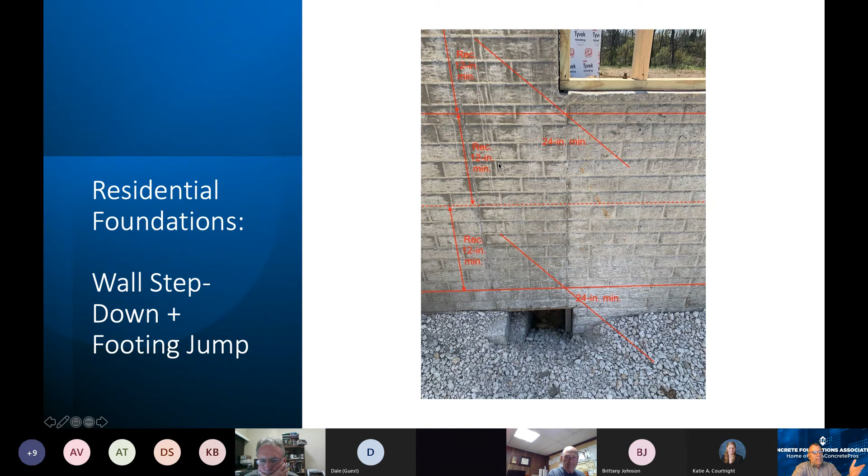This wall length we're looking at here is about 80 feet. The maximum plan dimension for the residential code is 60 feet. So they've got more shrinkage occurring across this wall than their steel is capable of holding. I can't augment that, I can't mitigate it once a crack develops, but I'm expecting a crack to develop right here on this form line that they can't control.

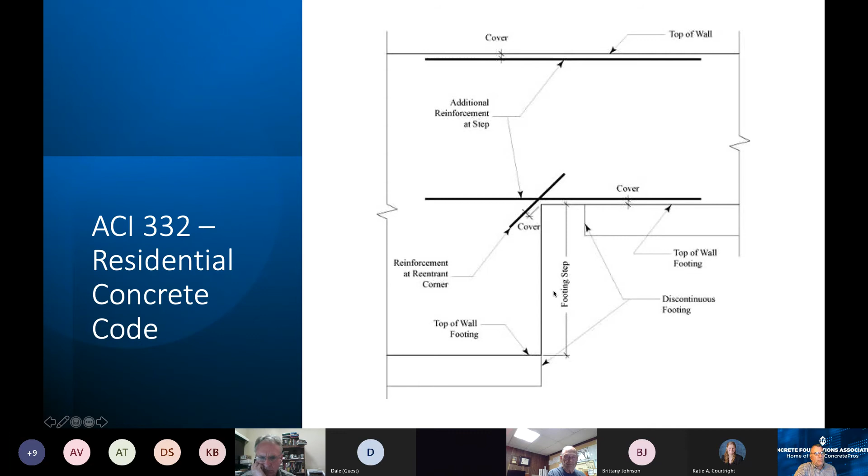Here's an example of the step down footing condition, reentrant corner. You've got reinforcing bars top and bottom. This is how we reinforce that step footing, and the footing is interrupted. We don't have to have a continuous footing here, which is a really excellent detail as long as that reinforcement's in place, and they're not putting that reinforcement in.

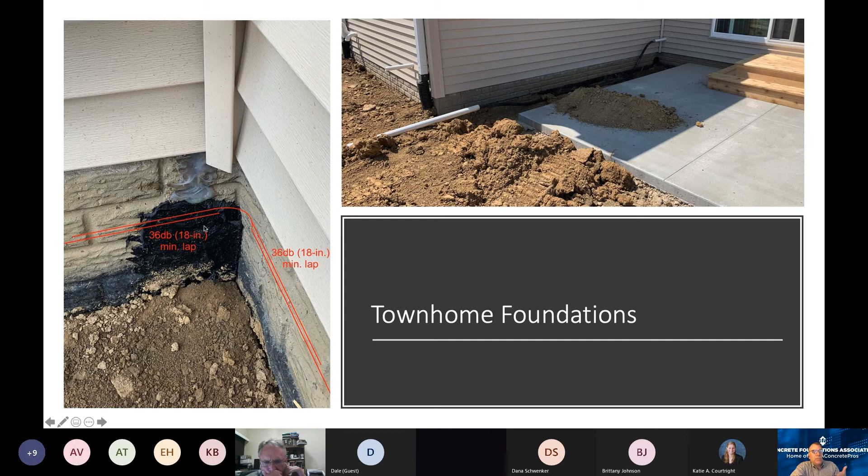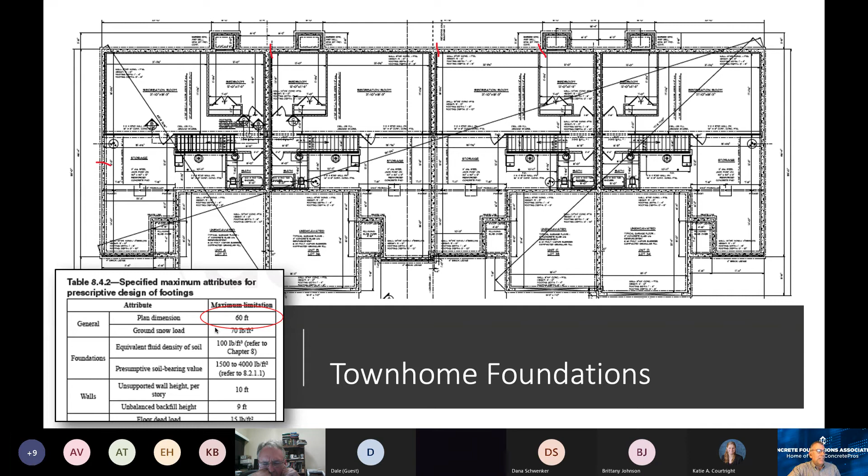The builder was not adversarial about it, but was certainly concerned - hey, let's stop this if we can. So we had to remind them what plan dimensions meant for maximum and minimum percentages of reinforcement, and how they needed to reinforce per code. Oddly enough, I talked to the builder about why they hadn't had an engineer look at this, and their comment, I quote, was: 'Engineers are too conservative, they put too much steel in these things' - which I thought was kind of funny, because that's what the problem was - they were missing the steel.

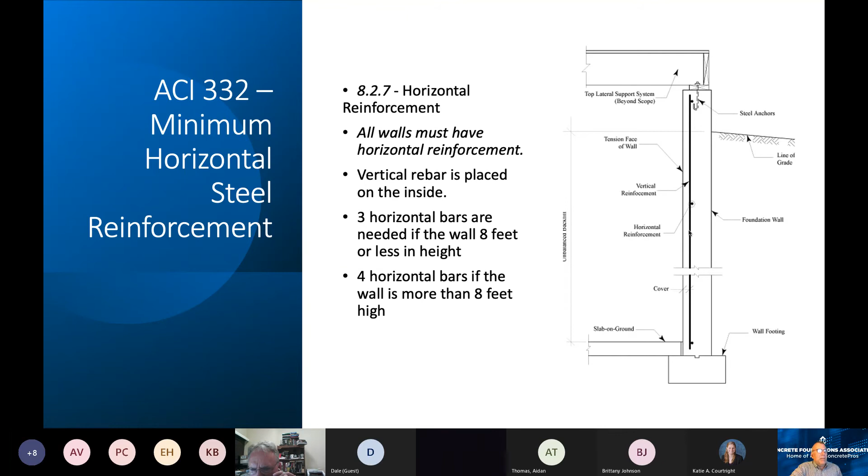So here's just a wall section. This is ACI 332 minimum steel. You can see there's 3 horizontal bars here at an 8-foot wall. So that's a decent amount of reinforcement for these minimum plan dimensions - 40, 50, 60 foot. It's going to be sufficient. It's going to hold those cracks together.

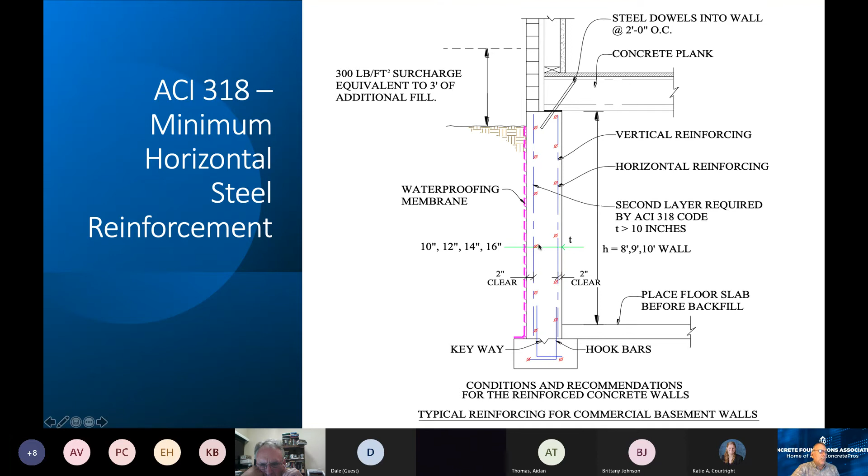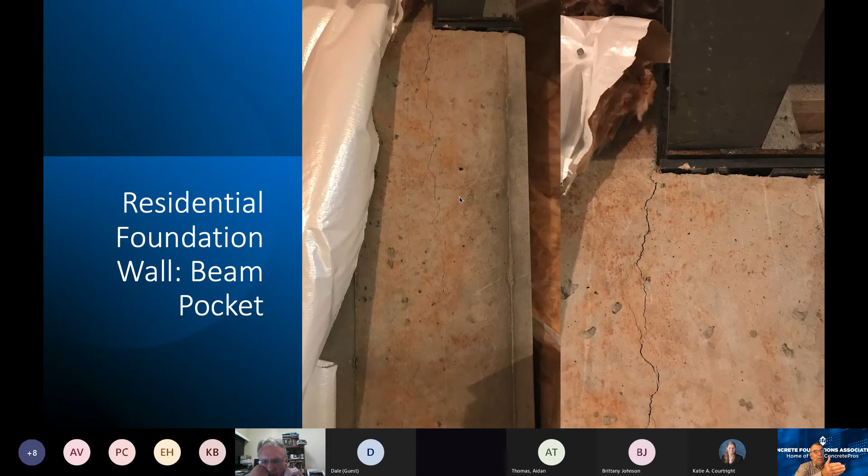You can see it propagating down. Now this one may or may not, to that question earlier, propagate all the way to the floor. It may or may not. My guess is at some point, even if it's at a molecular level, that crack will proceed either to this form joint over here, this form joint over here, or it might just continue all the way down. But it is reinforced underneath it so that it's not going to become a structural concern. It's hard to tell a homeowner, hey, that's a shrinkage crack, your wall's not going to fall down.

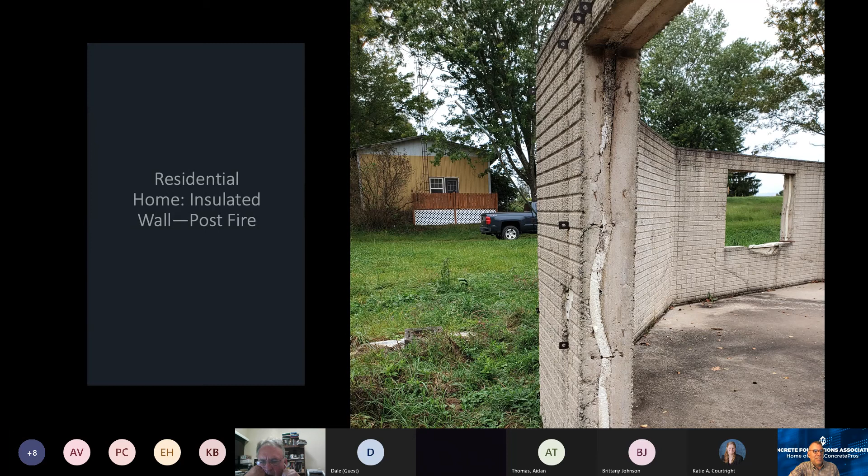When they built this wall, they couldn't control that insulation, which is really low strength insulation in the first place. All of the cracking there, again, not structural, but certainly is a concern for the performance of that insulation.

Okay, so where do you go? What other references are out there? How can you revisit this stuff? Brittany's recording this presentation, so I appreciate that. But some of the places, we've got several references out there.

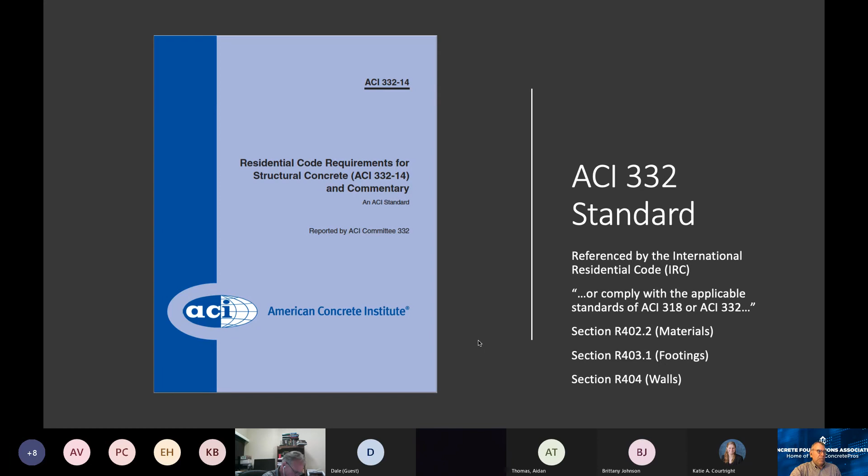There's also the residential standard I've talked about several times, the residential concrete code, and some of the detailing I showed you is part of this standard. You can get it through concrete.org, and this is referenced by the IRC as an alternative acceptable standard. It's paired with the 332 guide, and the guide itself talks about some of the differences between crazing cracking, concrete shrinkage cracking, plastic shrinkage, the stuff we've talked about today.

One of the things I appreciate most about these forums is invariably somebody says, hey, I've got this crack condition, what do you think? And the first half dozen responses share some photos. We want to see it. It's amazing what you can learn from looking at photos and assessing, just as we've been doing tonight, where cracks develop, why they develop, and what can we do with them.